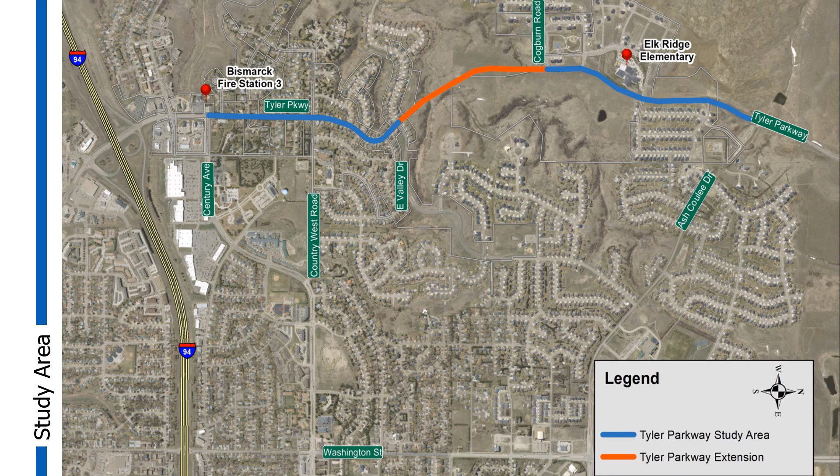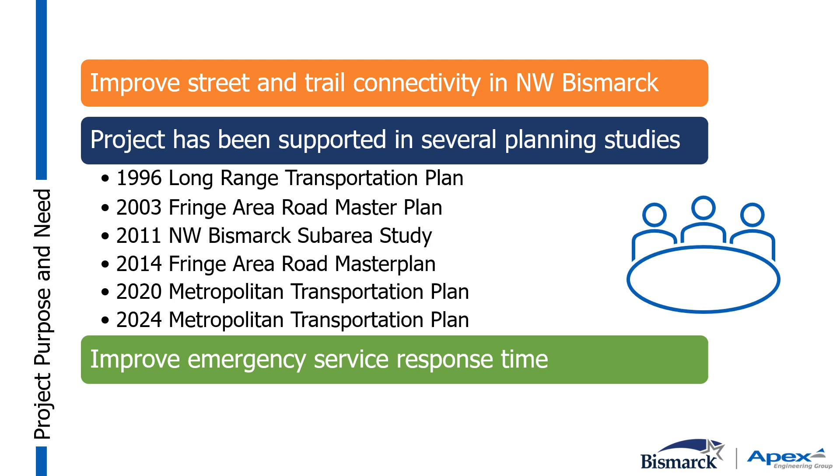Getting into the purpose and need of this project, the main purpose of the project is to improve the street and trail connectivity in Northwest Bismarck, where consistent growth has been occurring. This project has been mentioned in numerous studies dating back to the 1996 Long Range Transportation Plan to as recent as the current 2024 Metropolitan Transportation Plan. Reduction in emergency response time in Northwest Bismarck will also be a key benefit of this project.

As mentioned earlier, the emergency response time would be reduced with this project. The Bismarck Police Department has stated that this improvement would improve response time to Northwest Bismarck and increase the opportunity for patrolling due to the more direct route in and out of the neighborhoods. The Bismarck Fire Department and City of Bismarck GIS Department have prepared the map shown on the screen. As you can see, the response time to Elk Ridge Elementary would be reduced from 5 to 6 minutes to less than 3 minutes with the construction of this project.

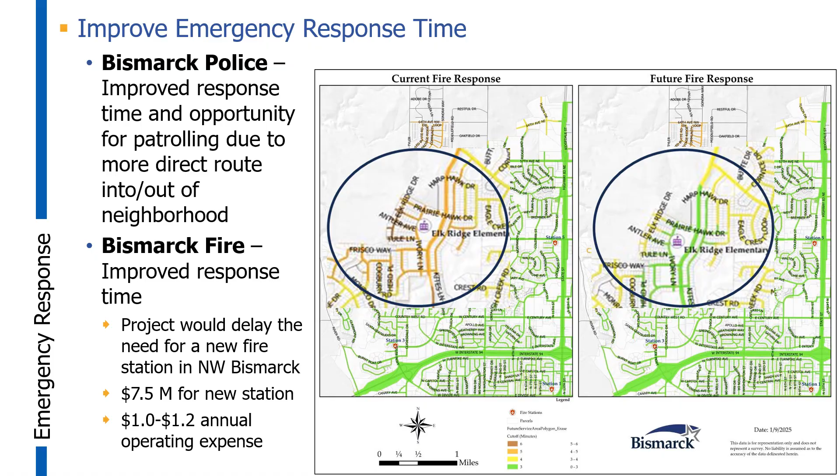Additionally, this project would potentially delay the need to build a new fire station in Northwest Bismarck. The current cost of a new station would be around $7.5 million, with an additional $1 to $1.2 million a year in annual expenses. Next, we're going to talk about the existing traffic and projected traffic forecast along the corridor.

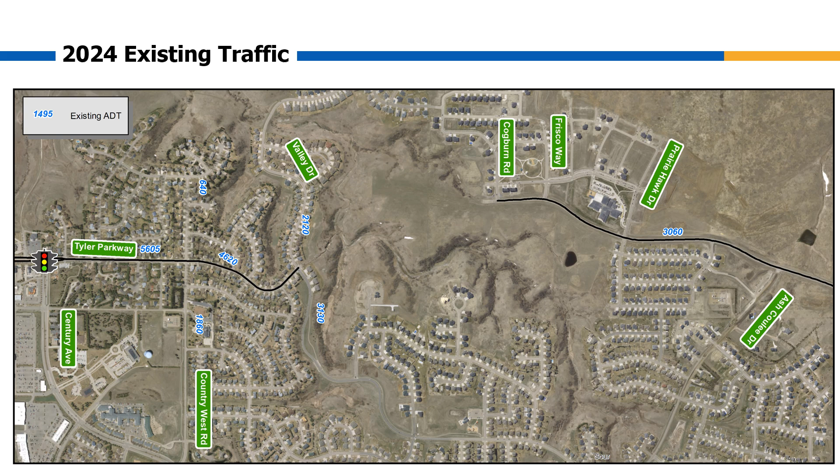Looking at the existing traffic along Tyler Parkway, the daily traffic volumes range from a little over 4,000 vehicles per day to 5,600 vehicles per day the closer you get to Century Avenue. North of Tyler Coulee near Elk Ridge Elementary, existing traffic is just over 3,000 vehicles per day. Also note the current traffic volumes along Valley Drive, which range between 2,100 and 3,100 vehicles per day.

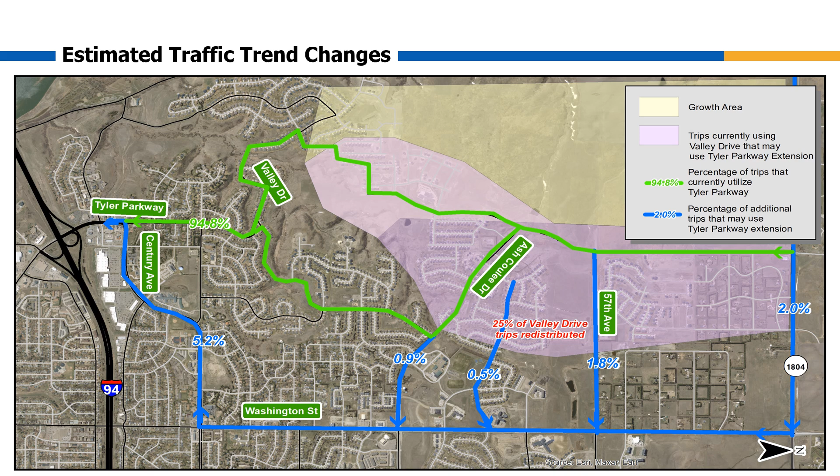The project team worked on estimating traffic volumes for the opening day traffic when the extension of Tyler Parkway would be built, with the understanding that traffic would be redistributed onto Tyler Parkway after the extension is constructed. The team used StreetLight data, which is a tool that tracks cell phone data, and identified trips originating north and west of the project corridor, and determined how many of those trips eventually ended up south of the Century Avenue and Tyler Parkway intersection. The conclusion was that those trips would likely be redistributed back onto the Tyler Parkway corridor and were added onto the existing traffic volumes as the method to estimate the opening day traffic volumes.

Traffic along Tyler Parkway increases approximately 6% from 5,925 to 6,225 vehicles per day south of Valley Drive and increases to over 4,000 vehicles per day near Elk Ridge Elementary School. Also note that traffic along Valley Drive would see a decrease in volumes due to the redistribution of traffic onto Tyler Parkway.

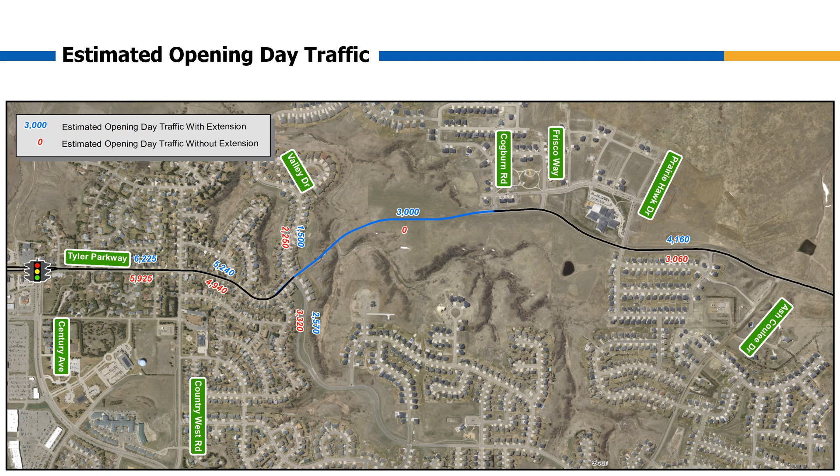Traffic speeds have been noted as a concern by the residents living along this corridor. A speed study was completed along the project at 2 locations south of Valley Drive and north of Cogburn Road. 90% of the traffic is traveling over the posted speed limit, with the 85th percentile near 34 miles an hour south of Valley Drive and 42 miles an hour north of Cogburn Road.

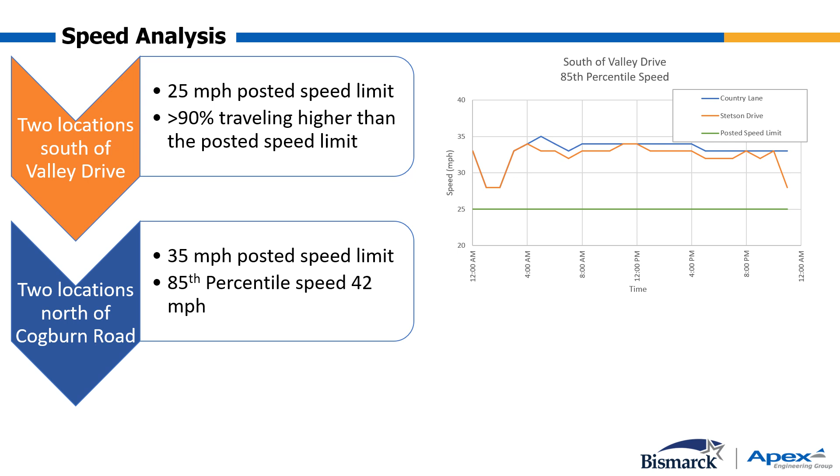Next, we're going to review the public survey and some of the feedback that we have gathered for the project. This project is unique to Bismarck, and as a result, additional input opportunities have been incorporated into project development. The first opportunity for public input was back in late November and early December when a project story map was released and a public survey was conducted.

In late January, a second round of input was conducted when a small homeowner meeting was held to hear homeowner concerns and work through proposed options along the corridor. Which leads us to the current public input meeting. From here, one additional opportunity for input will be at the City Commission meeting when recommendations will be made and brought forward for final approval.

First, let's take a look at the public survey data that was received back in December. Postcard mailers were sent to nearly 700 households in the Tyler Parkway, Tyler Coulee area. In addition, social media and website blasts encouraged residents to take the survey. From this, we received over 300 respondents, many of which were from households near the project.

Some of the key takeaways from the survey and stakeholder meetings was that speeding is a concern along the corridor. One of the other key takeaways was the usage of the trail system within Tyler Coulee. Of the 312 respondents, 186 people had additional written comments to the survey. Many of these were stating their opinions of whether or not the project should be built.

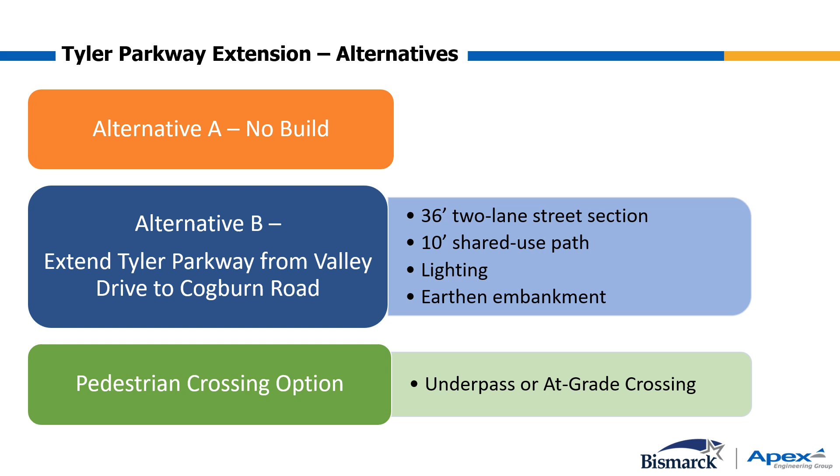Additionally, lighting would be installed from Valley Drive to Ash Coulee Drive, increasing the safety of pedestrians and awareness of drivers along the corridor. Additionally, an underpass or an at-grade pedestrian crossing would be included as a project option to maintain trail connectivity within Tyler Coulee.

Looking at the extension portion of the project between Valley Drive and Cogburn Road, you can see that the project would maintain trail connectivity in Tyler Coulee. We have shown on the screen the proposed location of the pedestrian underpass option should it be decided that it will be included as part of the project. You can also see a large diameter storm drain pipe that will be designed to stream crossing standards drawn in the bottom of Tyler Coulee.

The roadway profile through Tyler Coulee would be around 8%, which would be similar to East Divide Avenue between 33rd and 35th Street, and similar to 43rd Avenue between 15th and 19th Street. Looking at the shared use path system, this project would provide the final connection between the newly constructed trail near Elk Ridge Elementary and the existing trail system along Valley Drive. With this project, we will also grade a trail down to the bottom of Tyler Coulee on the west side of the roadway.

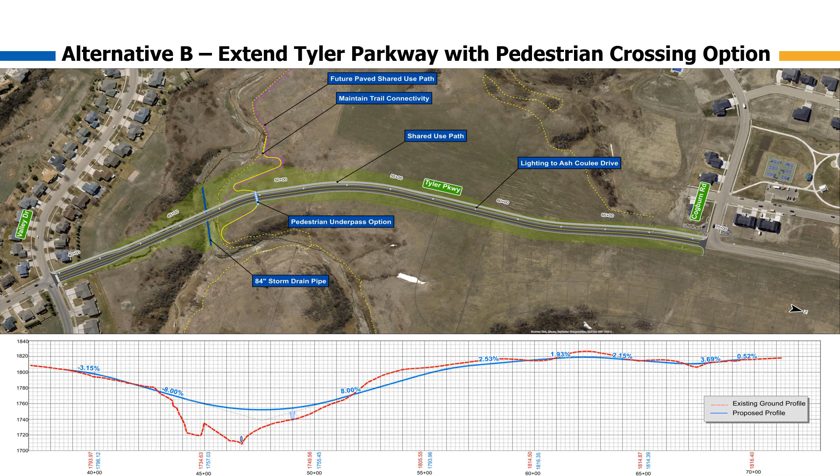This graded trail would work with the Bismarck Parks and Recs master plan, which would ultimately provide a trail from Tyler Parkway down to Clairmont Park with a future project. East of the roadway, there are no future plans to construct a path to Ash Coulee Drive.

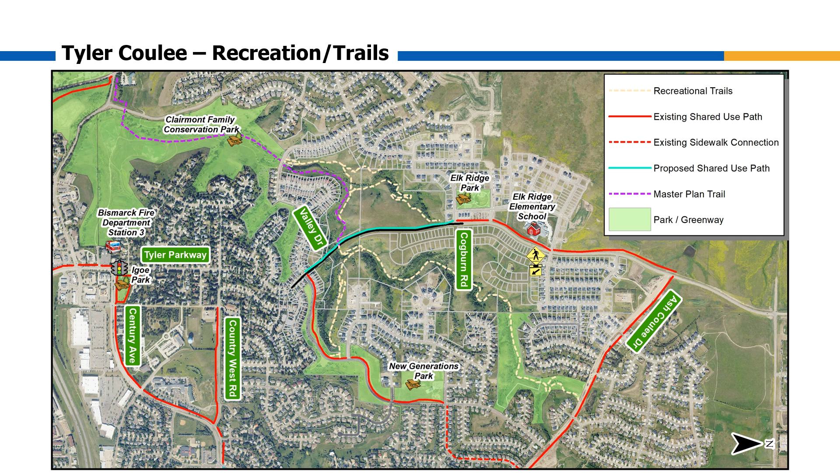Taking a look at the typical section on the Tyler Parkway extension, the roadway would be a 36-foot two-lane roadway with curb and gutter and lighting. On the west side of the roadway, a 10-foot shared use path would be constructed with a wide graded boulevard. Through Tyler Coulee, the same roadway section would be constructed, but the boulevards would be narrowed to reduce the impact in Tyler Coulee.

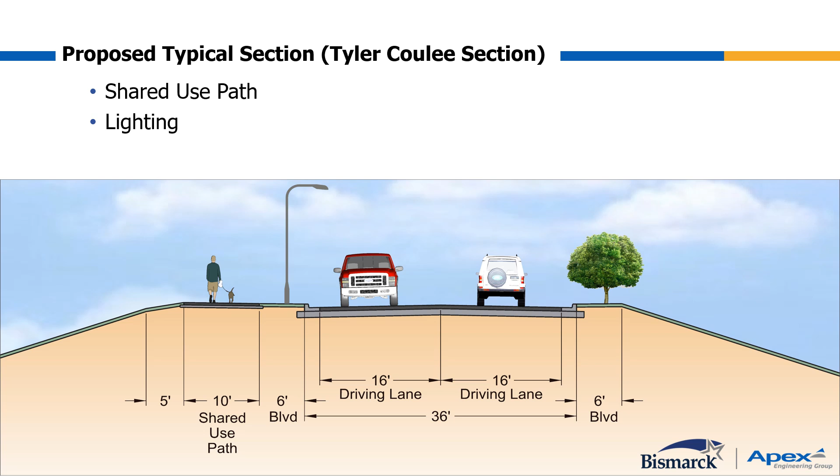The design of the embankment through Tyler Coulee has posed some challenges. Throughout the bottom of the coulee, poor underlying soils exist. As a result, this foundational soil will need to be treated to support the fill that will be placed within the coulee. Alternative construction methods were studied as part of this project, but ultimately were not pursued any further.

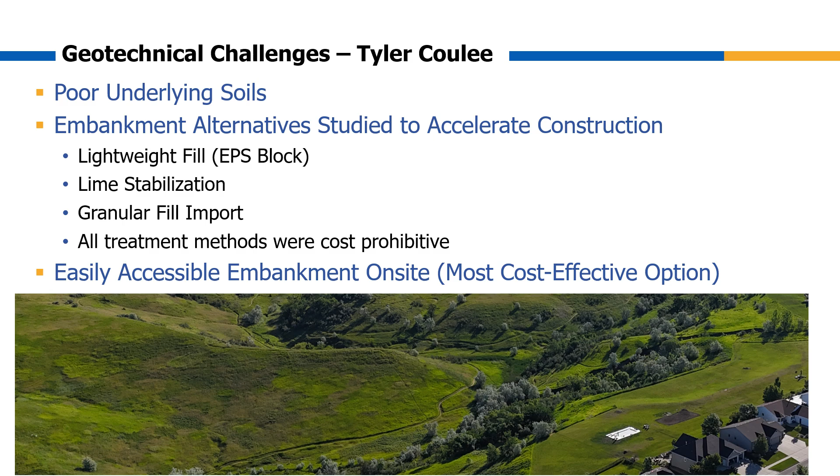These methods would have sped up the opening of the roadway, but were cost prohibitive as they would have added millions of dollars to the project cost. Ultimately, the most cost-effective solution is being brought forward as there is readily available dirt on site that can be used as the embankment. Next, we have a rendering of the proposed roadway and embankment.

Next, we want to discuss alternatives that were considered but ultimately not brought forward. As a result of some of the comments that were received regarding wildlife within Tyler Coulee, one option that was considered was a wildlife crossing. This option was ruled out for a few reasons. Typically, these are installed along high-speed rural roadways where vehicle-animal collisions pose a threat to vehicular passenger safety.

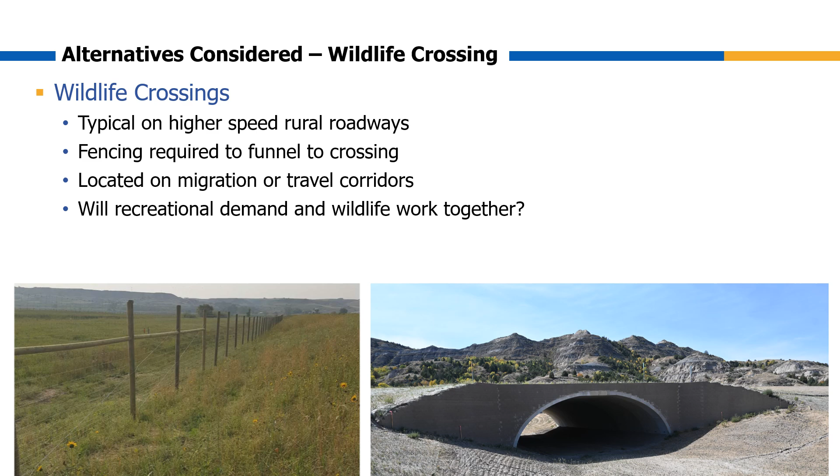In order for these crossings to function properly, the coulee would have needed to be fenced in to force the animals to use the crossing. This fencing is typically an 8-foot-high woven wire fence, which would not have been desirable in a residential setting. Also, maintaining trail connectivity in Tyler Coulee with a fence would be a challenge.

Another alternative that was considered but not carried forward was a bridge across Tyler Coulee. This option was not carried forward due to cost and maintenance concerns. The bridge alternative would have added an additional $6 million to the project cost. In addition to that, long-term costs associated with maintenance and scheduled inspections would need to occur.

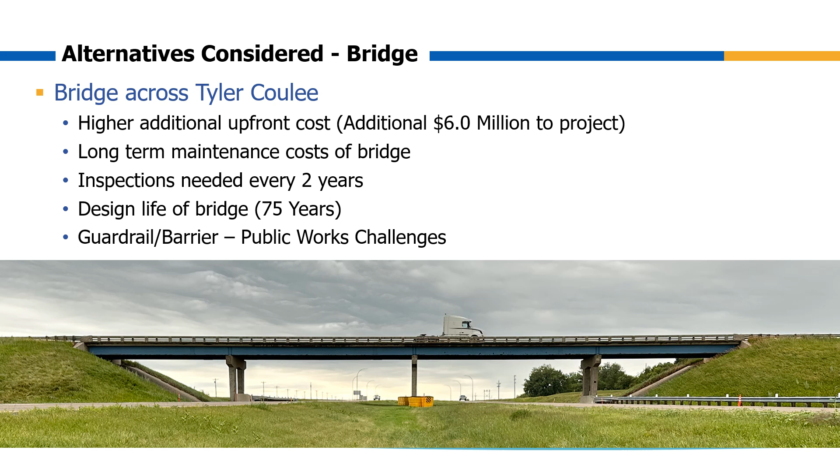Ultimately, the bridge has a design life and would need to be replaced down the road in addition to the upfront costs. Also, with bridges, guardrail and bridge rail vehicle impacts would lead to additional maintenance, along with snow removal challenges in the wintertime.

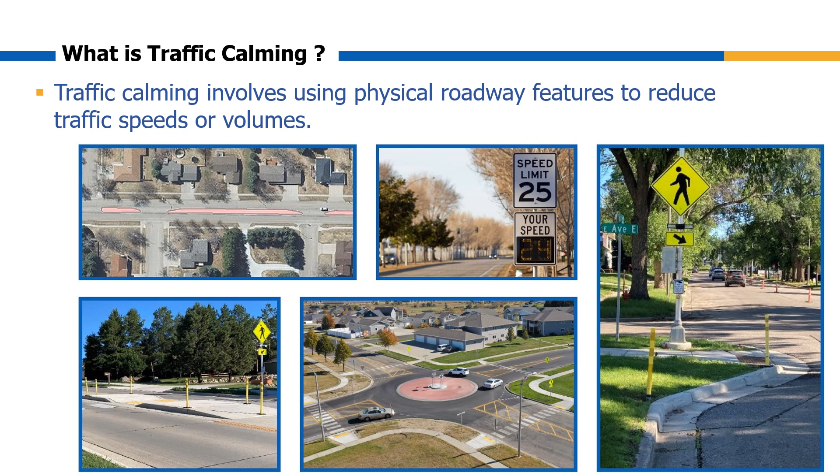Next, we're going to talk about the traffic calming options that could be implemented as part of this project between Century Avenue and Valley Drive. First, let's explain what traffic calming is and how it works. Traffic calming are physical features that are installed to reduce traffic speeds or volumes. Examples of these are pictured below.

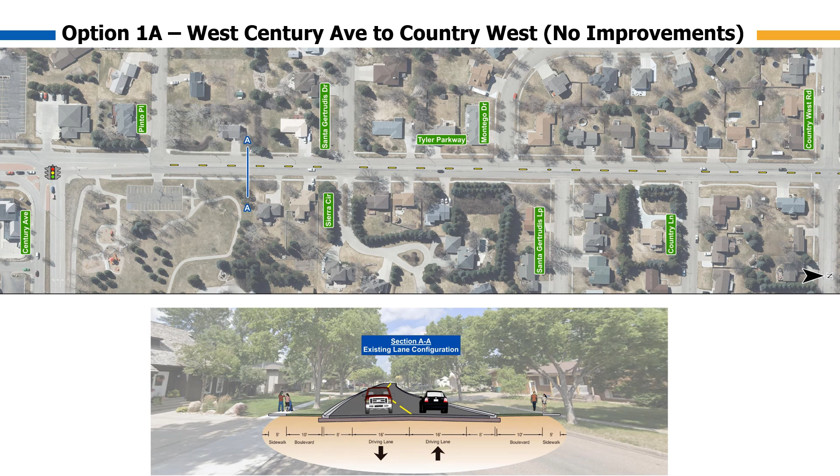Between West Century Avenue and Country West, two options have been developed. The first being a no-build option. With this option, option 1A, the roadway configuration would not change and would stay as a two-lane roadway.

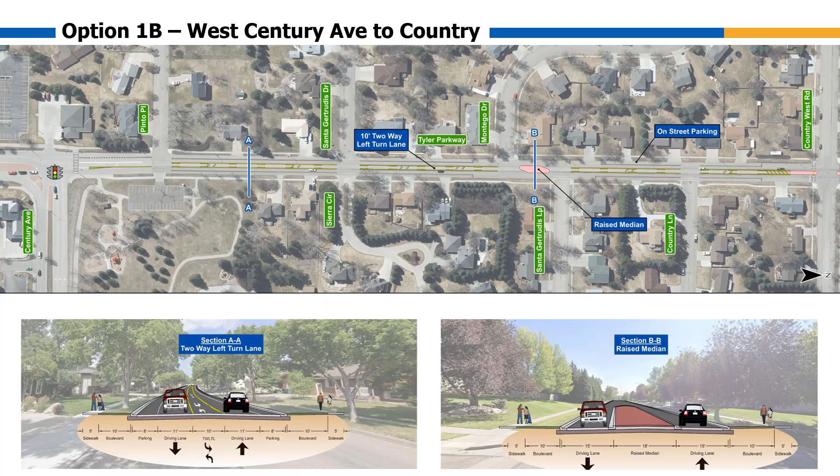With the build option, option 1B, the existing two-lane roadway would be converted to a three-lane section, complete with a center two-way left turn lane. A median island would be installed just north of Santa Gertrudis Loop with this option. The width of the driving lanes would be reduced to 11 feet to help control the speeds of the vehicles along the corridor. Parking would be maintained on both sides of the roadway with this option, with the exception near the median island, which would be removed.

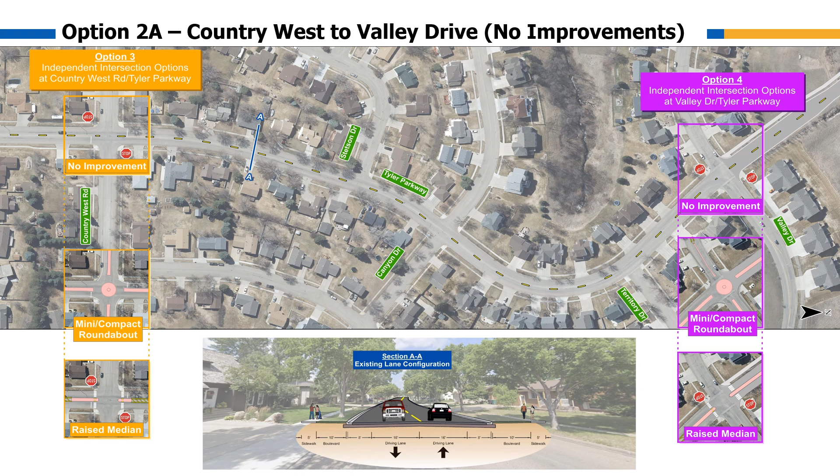Between Country West and Valley Drive, 3 options have been developed. The first being a no-build option, along with 2 build options that have been developed. With this option, option 2A, the roadway configuration would stay the same as it is today. With option 2A and 2B, intersection improvements could be implemented as part of the project. They are shown as options 3 and 4 on the screen. We will talk more about those 2 options shortly.

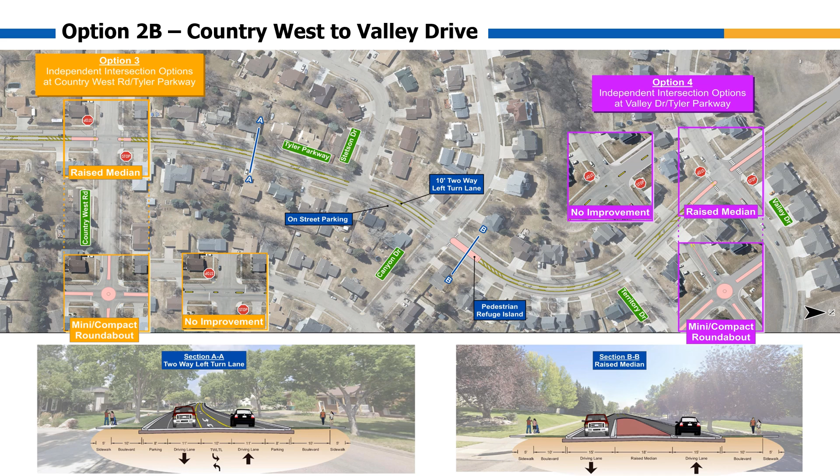With build option 2B, we would convert the existing 2-lane roadway to a 3-lane roadway, complete with a center two-way left turn lane. A median island would be installed just north of Canyon Drive with this option. The width of the driving lanes would be reduced to 11 feet to help control the speeds of the vehicles along the corridor. Parking would be maintained on both sides of the roadways with the exception of the area near the median island.

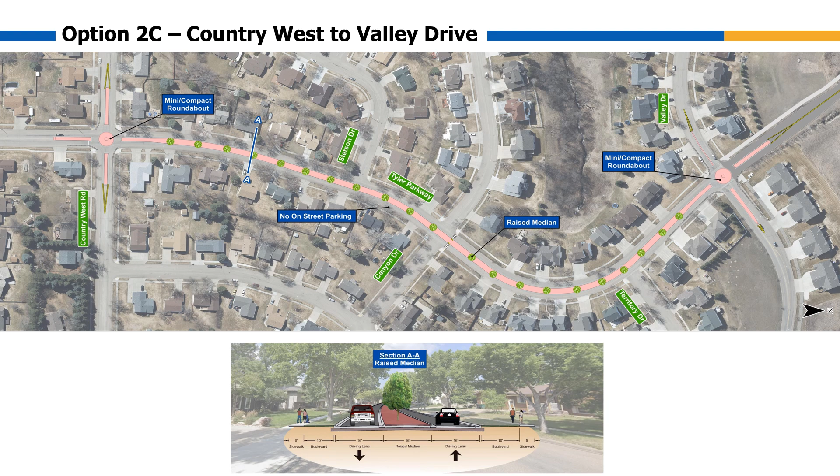With build option 2C, a continuous raised median would be installed between Country West and Valley Drive. With this option, a mini or a compact roundabout would be installed at both Country West and Valley Drive intersections. With this option, parking would be eliminated on this stretch of the roadway.

At the Country West intersection, 3 options have been developed. The first being a no-build option where the intersection would stay in its current state. The second option would be to install a mini or compact roundabout. This option would provide the greatest reduction in vehicular speed near the intersection. The third option would be to install a raised median island at this intersection. This option, along with the mini roundabout, would give pedestrians a refuge in the middle of the roadway, increasing the safety of pedestrians.

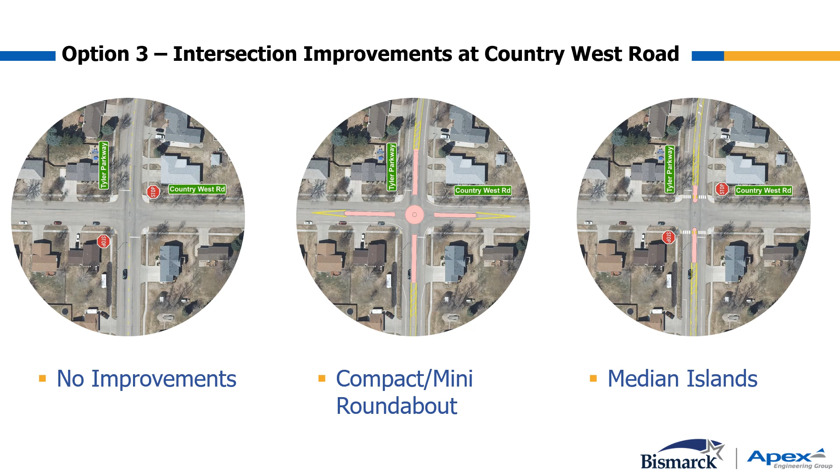At the Valley Drive intersection, the same 3 options have also been developed. The first being a no-build option where the intersection would stay in its current state. The second option would be to install a mini or compact roundabout. The third option would be to install a raised median island at this intersection.

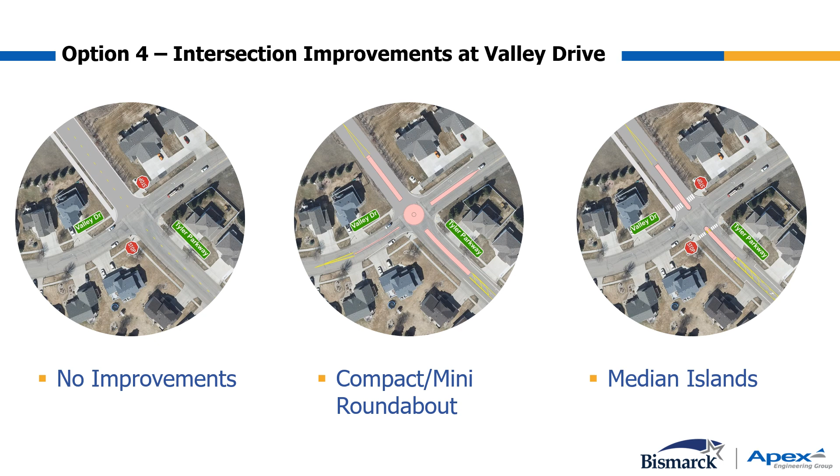Reviewing the cost for the build alternatives, the Tyler Parkway extension would cost around $10 million. If the pedestrian underpass was incorporated into the project, it would cost an additional $175,000. All of the project costs, both with the extension and the traffic calming options, would be funded by the half-cent sales tax. No special assessments would be used with this project.

For options 3 and 4, the raised medians would cost between $75,000 and $100,000 per location, and the mini roundabouts would cost around $250,000 per location.

Looking at the project schedule, we are currently in the preliminary design and public input phase of the project. As mentioned earlier, commission decisions and concept approvals will occur in April or May of 2025. From here, we will finalize design and go out to bid this fall with construction starting in 2026. The embankment fill will be placed the first year of construction, and the roadway extension will be completed in 2027 to allow the embankment to settle within Tyler Coulee. This concludes the presentation for the Tyler Parkway improvements.